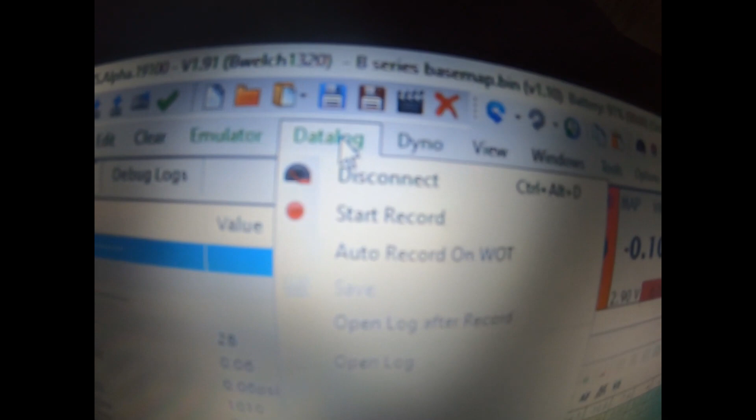So when I get my stuff set up, especially for the data logger, it's actually recording right now. Still kind of learning the software, but as you can see, that's pretty much my first try getting the emulator and the data logger working. First try. On BM Tune, it took me at least like 10 times. I had to switch back from Crome, and it just kept on having issues. So that's a big thing right there, which makes me really happy with the software, is everything got hooked up the way it should. First try, I had no issues whatsoever.

So big points for HTS, and I'm looking forward to using this tuning software a lot more. Definitely a lot better than Crome. The H22 we got coming over is just factory bone stock, so it should go pretty quick, shouldn't have any issues. Hope you guys enjoy this little street tune we're gonna do.

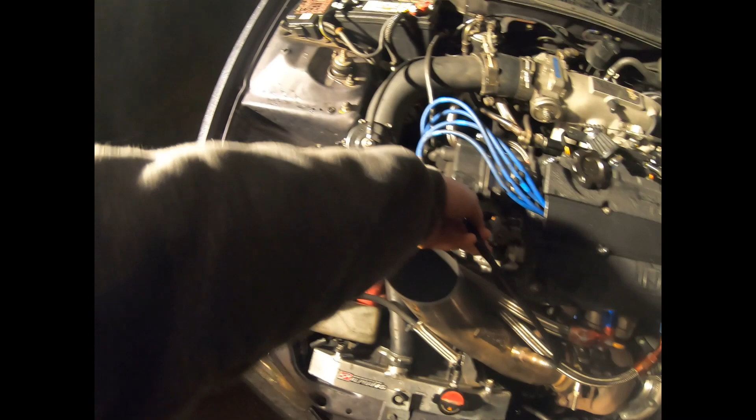Alright, gotta get the wideband pulled off the streetcar. Pretty simple with the up pipe, just goes right through there and out. And I got it set up pretty fancy. All I gotta do is unplug my cigarette lighter, and that is how I got my wideband wired in. Just in this little cigarette lighter, connect my power and ground, and it works just perfect for easy, quick disconnect wideband. It's been working good for me so far, and really simple. Instead of having to disconnect your chassis ground and disconnect it from the fuse box or however you got your power hooked up, that little cigarette lighter trick I like a lot.

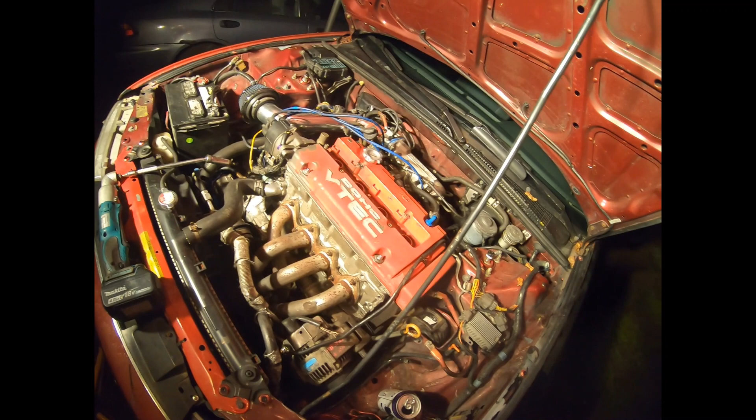We got the car here, H22A. We're getting the wideband hooked up right now. Pulling out the spark plugs, see what the previous tune was like. These spark plugs are showing signs of spark knock. So the base map that it was on was actually hurting the motor.

We got a fresh set of plugs that we're gonna throw in after we get fuel all dialed in and get ignition at maximum brake torque on the low cam. Then we're gonna throw in our new plugs and start doing pulls. But this is what the old spark plugs look like. I don't know how well the GoPro is gonna pick it up, might take a minute to focus. Anyway, plugs don't look good.

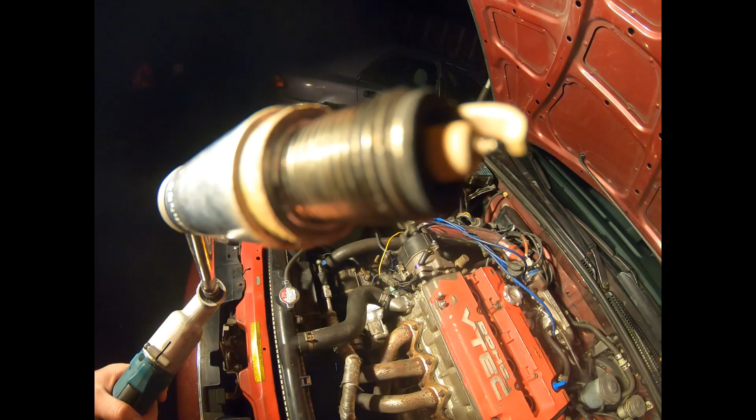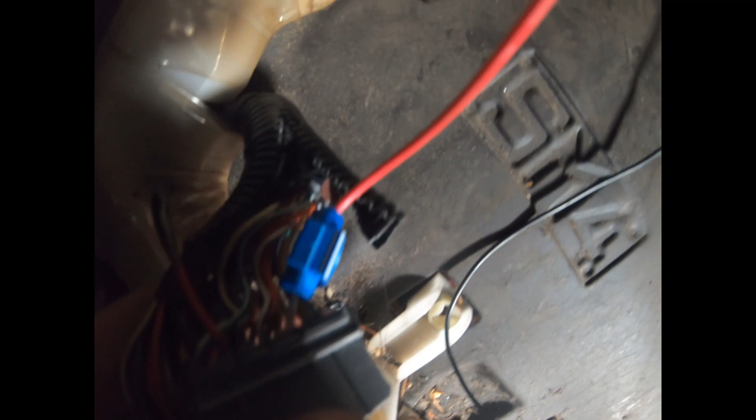We got a new set of BKR7Es that we're gonna throw in. Got the wideband all hooked up, we're just gonna go out through the hood for now. And then we got our wideband tapped into D14. Just using one of these simple blue quick splices, see if I can get some good light. I use these all the time, they work pretty good for me, never had any issues. That splices into the D14, then got that going to my white wire. My wideband goes into the cigarette lighter, and now we have wideband.

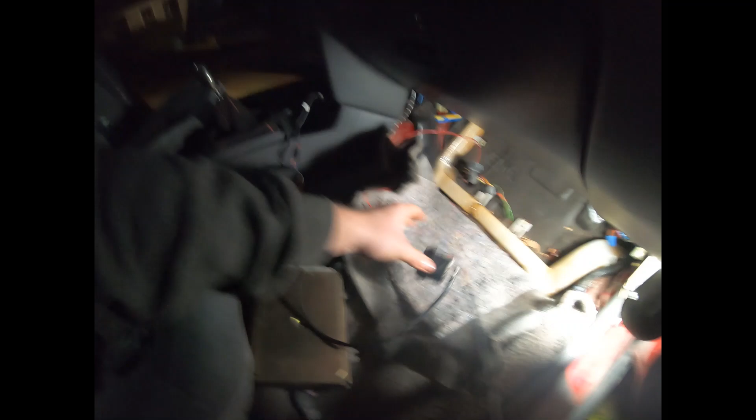Now I just gotta get my ECU plugged in and get the tune loaded and try and get the car to fire. Okay, we're ready to get the tune uploaded. Gotta connect the emulator. Bam, first try. Data log, connect, everything popped up, first try. Connected, perfect. Gotta upload the tune.

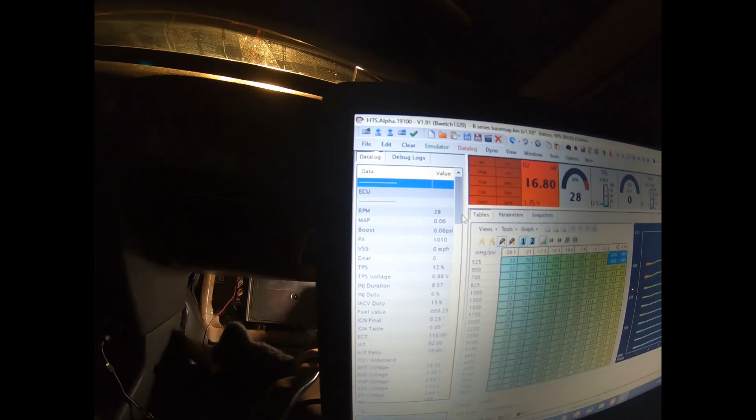Looks like we're going here. Real-time update is selected.

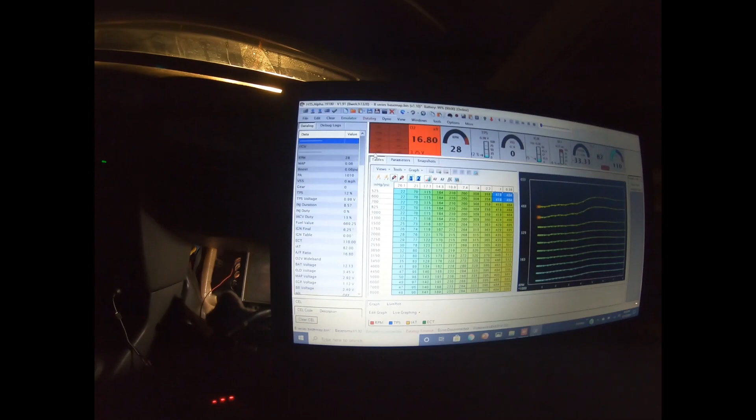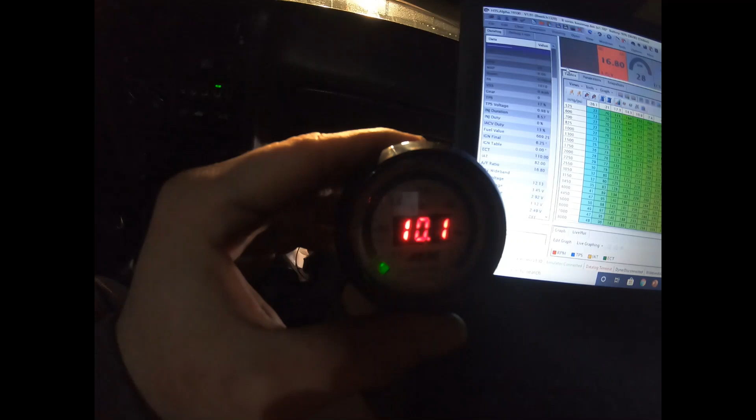Alright, start the car. It's never started that fast even. Wideband's warming up, so far it's saying it's dumb rich. Give it about 30 seconds or so. Check engine light is on.

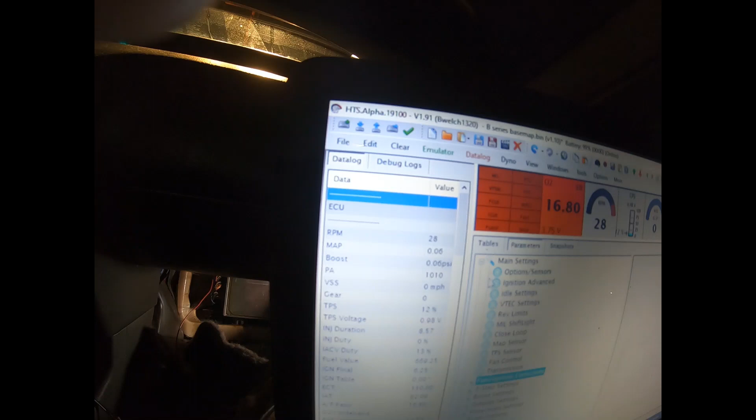Go through my parameters, see if I can find anything while the check engine light is on. Okay, I'm just gonna run through my parameters real quick, I'm gonna trim out some fuel. Oh, it's already starting to trim out by itself. Then I'm gonna run through the sensors, trim out a little bit of fuel, and then I'll get back to you guys.

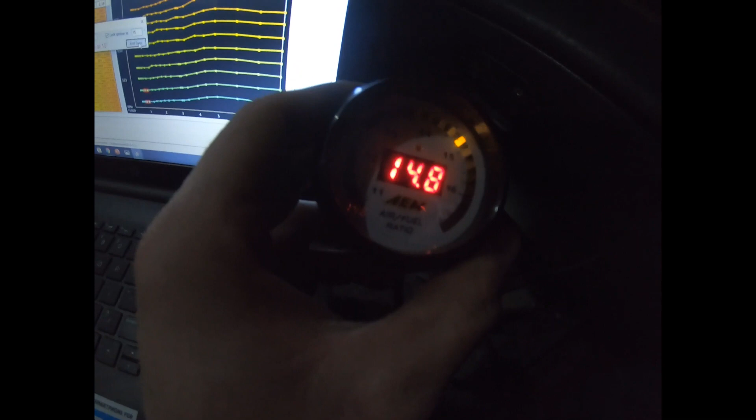Okay, we got everything sorted out. Got timing synced — well, not synced, we got it locked, so we're ready to sync it. Air fuels are good. We had to try a couple different ROMs to get the software to work, but we got it working now, and we're getting ready to shoot timing and go out and do some street tuning.

Okay, got timing set, 15 degrees. Can lock this in now. Man, mint. Okay, we're getting the car out on the streets now.

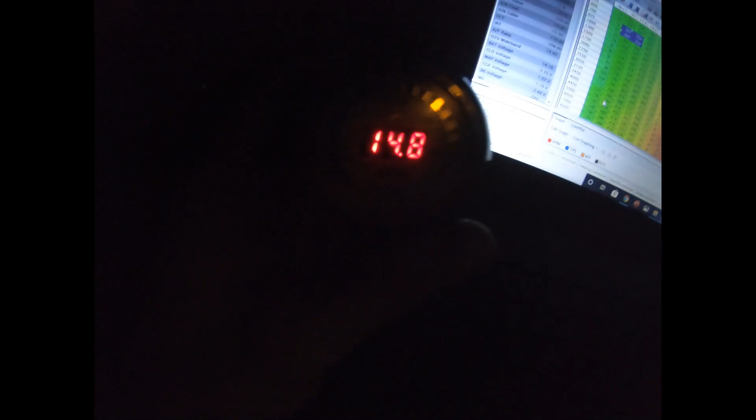Just doing our part throttle. Okay, we just got our Lambda overlay set up. We're gonna build our table, and then we're gonna make our adjustments. Right now, car is really rich, starts leaning out a little bit. It's 2,500, keep holding it. Okay, go up to 3,500.

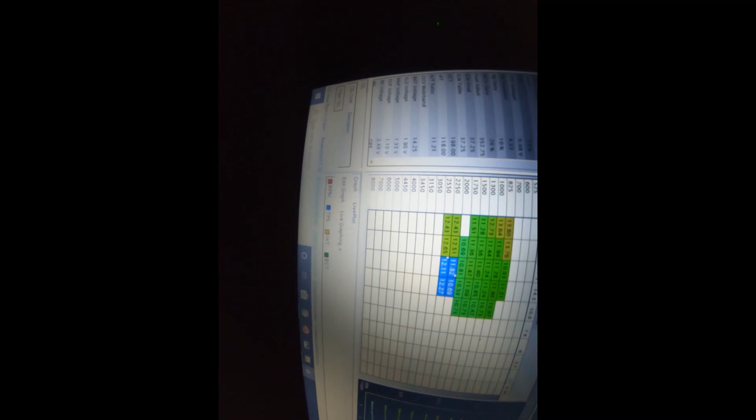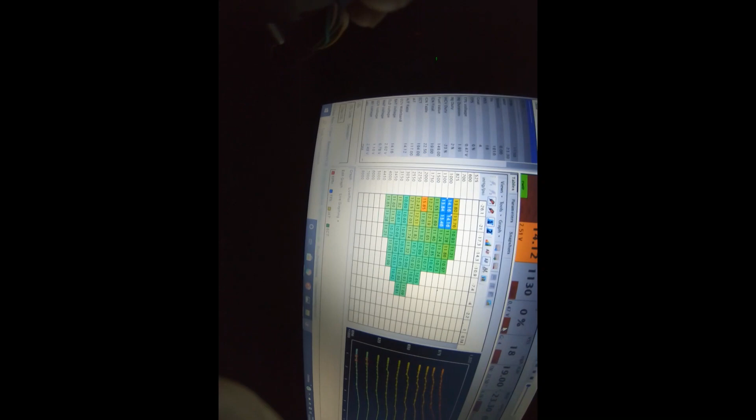In that area, we're gonna pull out fuel, make our adjustments, smooth everything out, make it mint. Just got a bunch more fuel pulled out. Now we're about to go make our second drive.

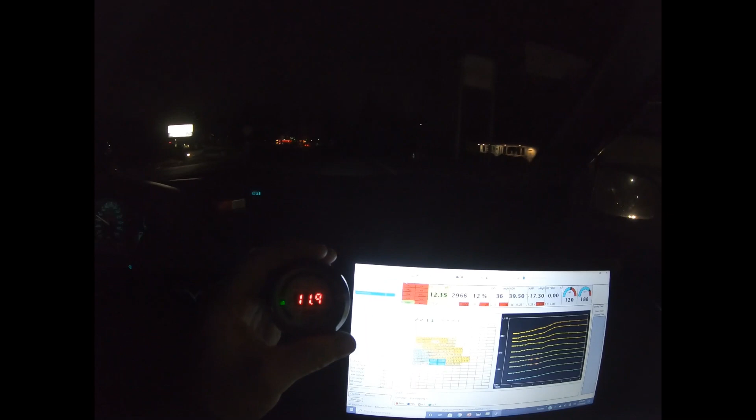Still rich, so we'll pull out some more fuel. We'll just drive around town now and I'll make some minor adjustments. We'll keep on going up to about 4,000 RPMs real slow so we can get accurate data points, and I'll keep making adjustments, and after fuel's all dialed in, we'll get into some wide open throttle pulls.

So far the software is working pretty good.

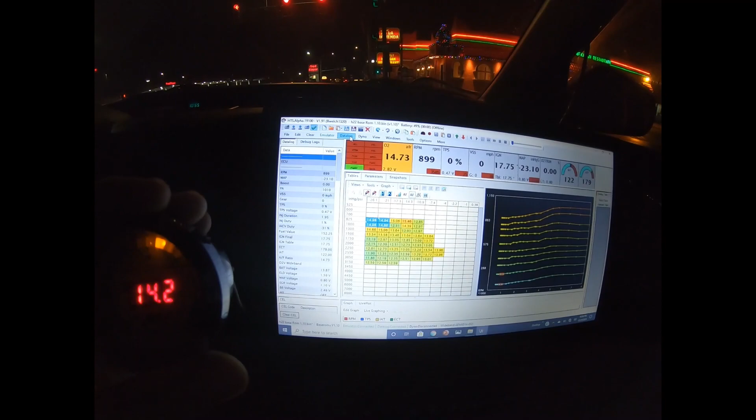Did I not just record all of that? God, that was good too. Damn, dude.

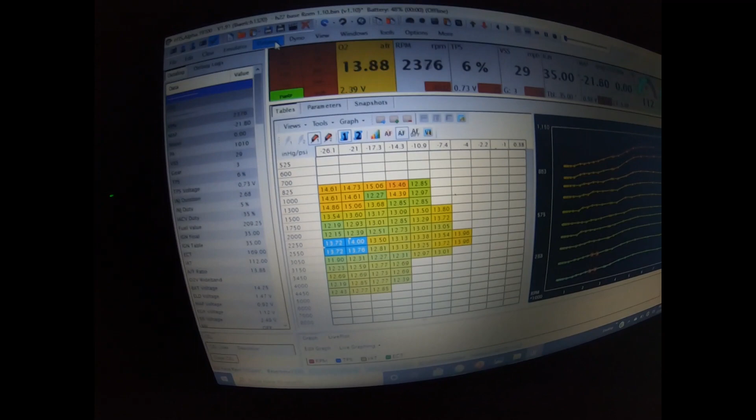Okay, we're driving around on the street now. We made some fuel adjustments, pulled out a bunch of fuel, and now we're populating the chart some more. We're gonna make some more fuel adjustments, just taking the car up to about 4,000 RPMs really slowly to get accurate data points, and then make our adjustments.

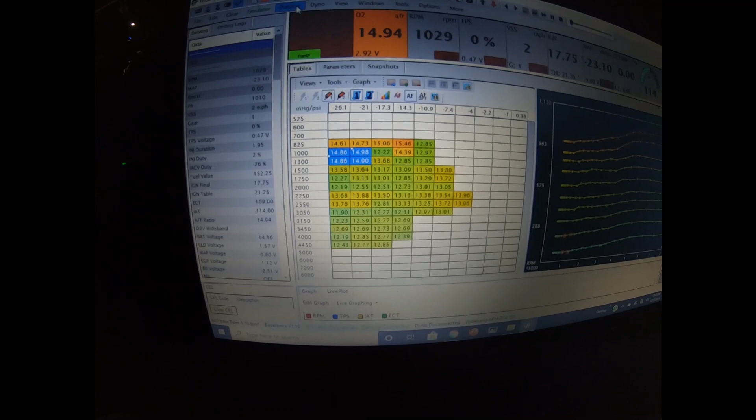Software is working pretty good. I had to mess with it for about an hour and a half with the ROM, but after I got that all figured out, it's working good now. One thing that works good with this is the real-time update, and that did not work on BM Tune, so that's something I'm really pleased with this software, and I'm excited to see where else the tune goes.

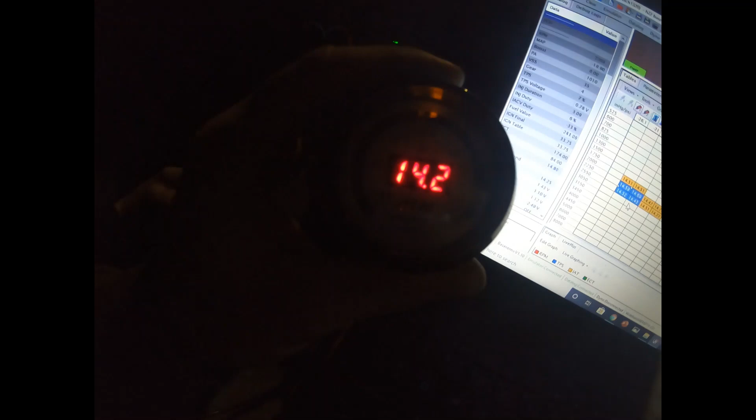Low cam feels, tune pretty decent. You could probably floor it in third up to 5,000.

Doing some wide open throttle pulls. We're rich, so we're gonna pull out some fuel, and then we're gonna do some more wide open throttle pulls until our air fuel gets to our desired goal, which is 12.5.

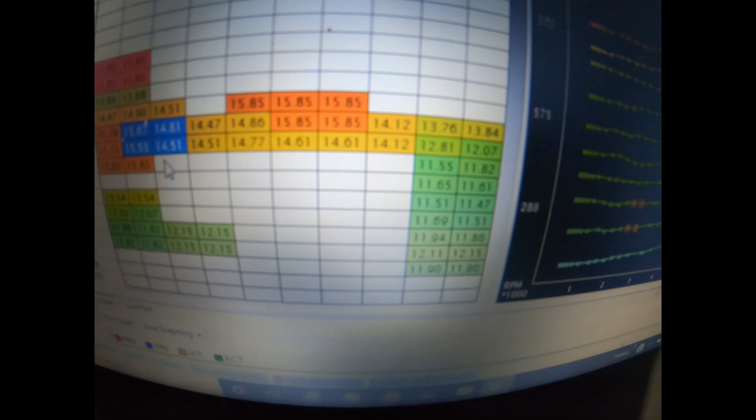Tuning in open loop. Feels pretty decent. You can still pull out a little more during idle.

We're good to do another third gear pull when you are. 2,000 up to 3,000, or up to 5,000.

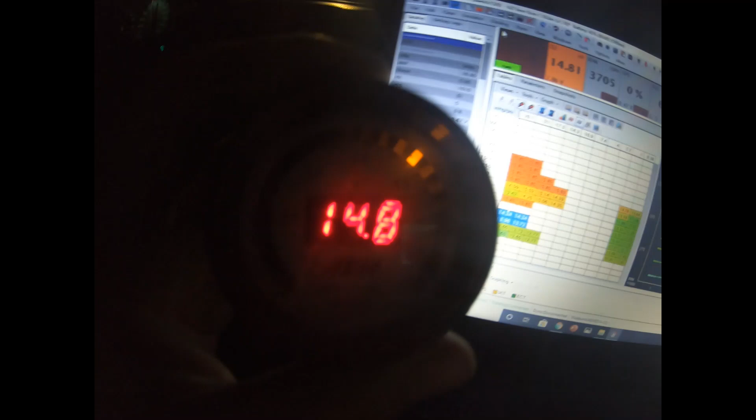Okay, so it's definitely still rich. It was in the 11s, so I'm gonna pull out more fuel and adjust.

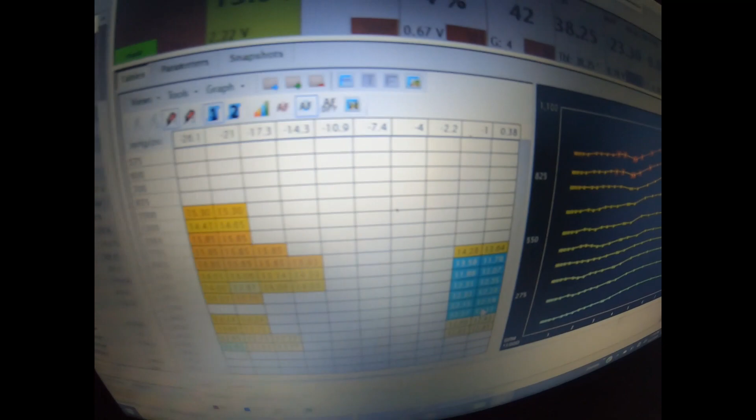Gotta turn off the data logging to make my adjustments. Pull out another 4%. Then just kind of smooth it in. Blend in all my changes.

Okay, you're good to do another 2,000 to 5,000 pull. Third gear. Rich.

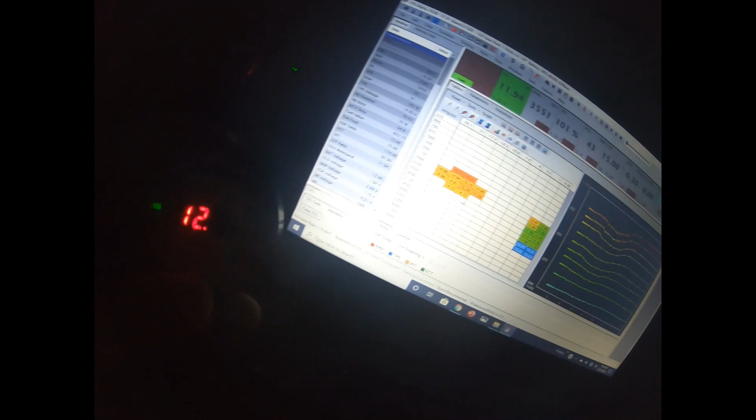Okay, it's getting closer. Still got to pull out a little bit more fuel.

Huh, he definitely heard us. He started flashing his flashlight.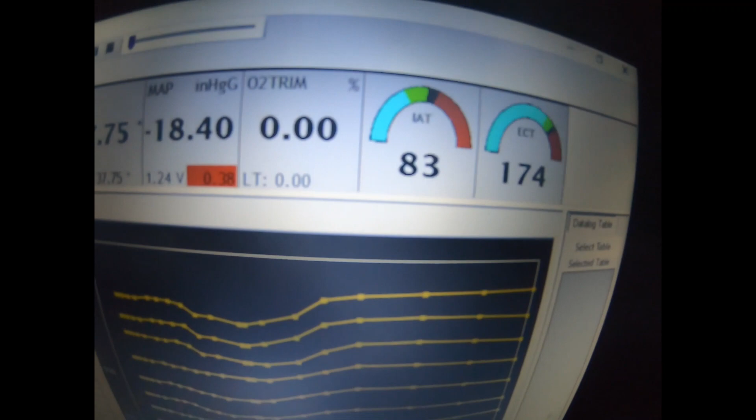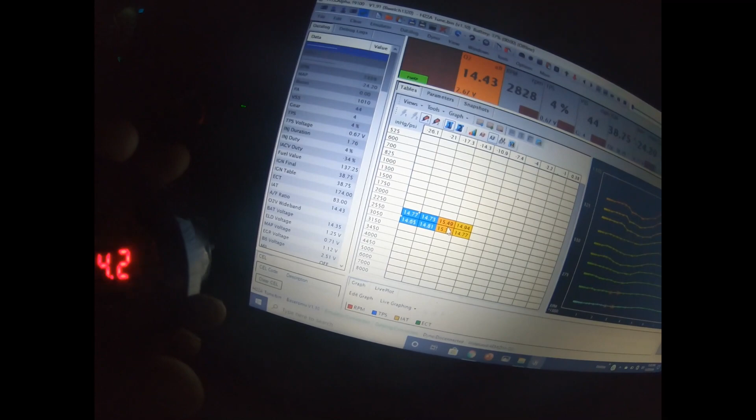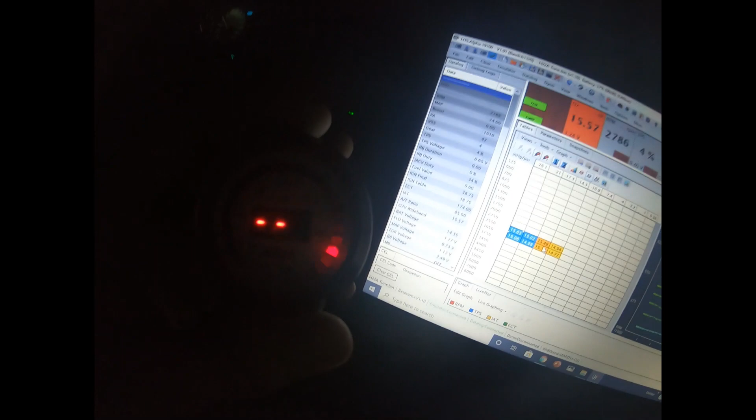Okay, car's got good throttle response. Fuel is pretty close. This car is going to be tuned on open loop, so our air intake temps are pretty cold, so we just have to make sure that we keep our air fuels a little more on the rich side, because when it gets more hot out, the car is going to want to run more lean. We have to keep that in mind. Right now it's around 14.8, 14.7-ish, so we probably have to add just a little bit more fuel into that to compensate for when the car sits for a bit, like at a stoplight or in a drive-through, and air intake temps get more warm. If we throw in an extra about 5% fuel, maybe even like 3%, it'll help compensate with all that.

So we're ready for another pull. Third gear. We can even try 3,000 to 6,000 now.

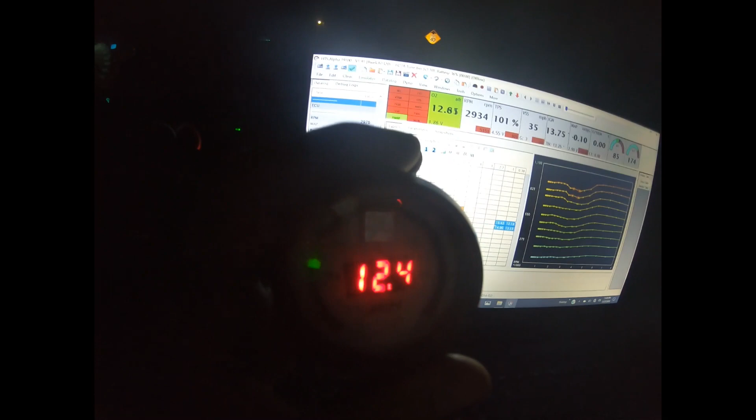On the top end, gotta pull out a little bit more fuel. Other than that, it looks pretty close, pretty spot on if we're gonna compensate for the air intake temps too, since those are so low.

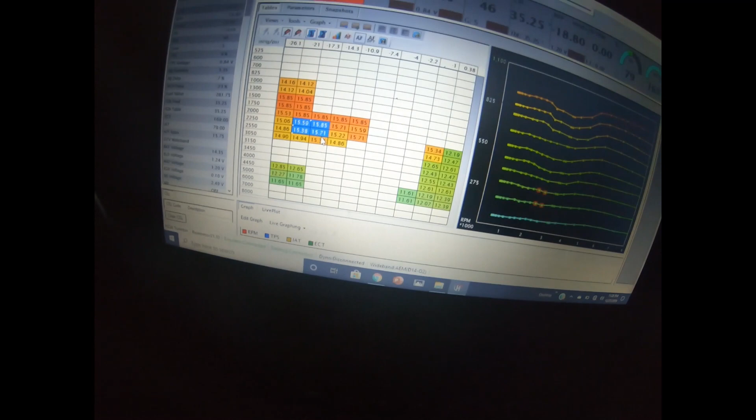So yeah, pull out fuel. Gotta turn off data log, go down here. Pull out another 4%. Smooth that in. Mint.

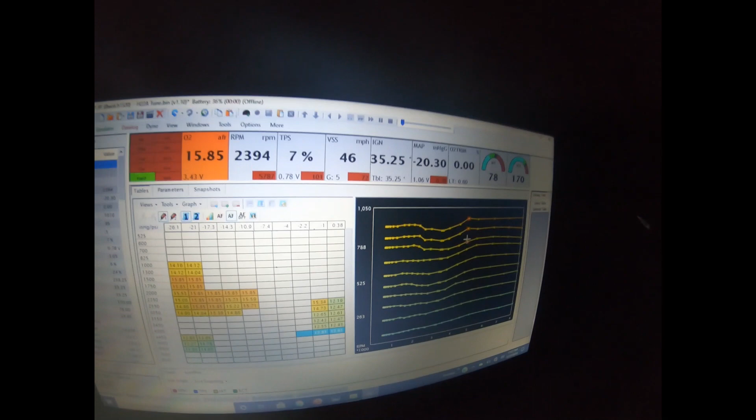It's getting a little close. Smooth that in just a wee bit.

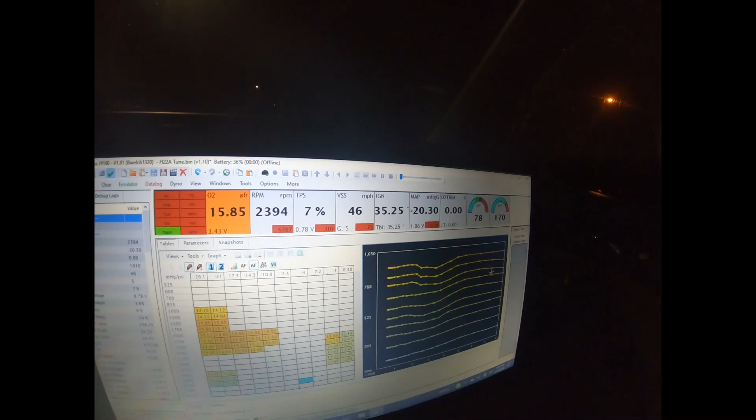Picking the tune a little bit, making it how I want it to look.

And we're probably good to do another pull at the stop sign if you actually want to do like a 1, 2, 3. Yeah, we can get through this way. We'll take the other route. Oops, let me clear the graph.

Since our air fuel is pretty close right now, we can see what the 1, 2, 3 does. Make sure all our air fuel is pretty decent. Wide bands right here. Ready? Yep.

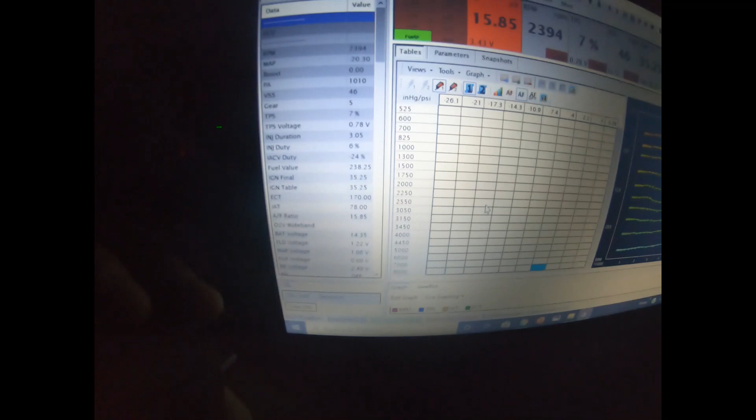Air fuel is pretty good. I did not press record, so I didn't get none of that. But from what I seen, there was just one little tiny lean spot that I gotta clear up. But yeah, that looked good, man.

Oh yeah, it logs up here. So yeah, if you want to do that again, yeah.

Straight tuning, straight hooning. Fuck yeah. I did the stop sign, so.

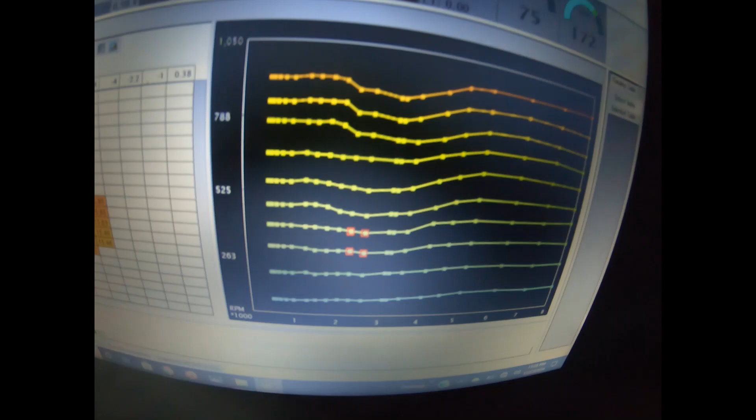Graph's starting to get pretty good. We got a weird slope going on up here. Usually that's an indication of bad injector dead times. These are stock prelude injectors, so I don't know what that's about. Got a weird dip right there. Oh well, stock injector thing.

Hold on, before you do it, I gotta clear the table. Okay, table is cleared. This is the low cam, no VTEC.

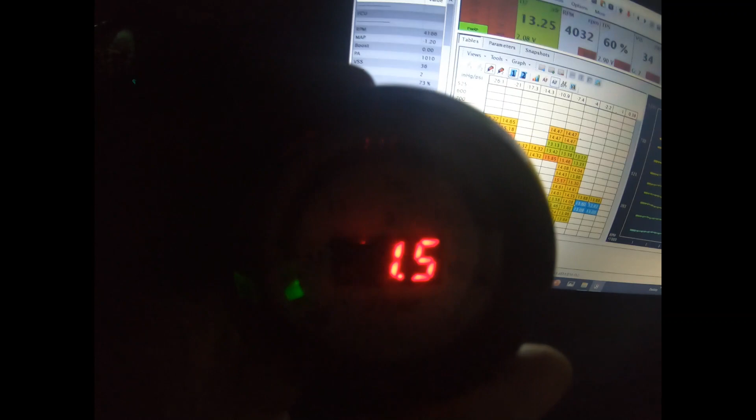Not too bad, not too bad. Burning evenly. Pulling over to swap plugs real quick.

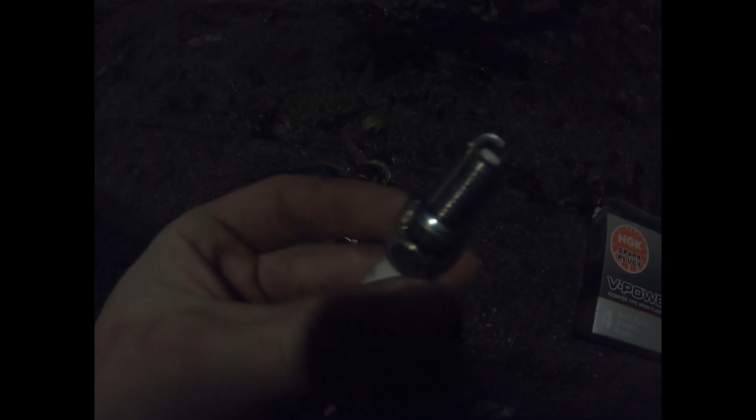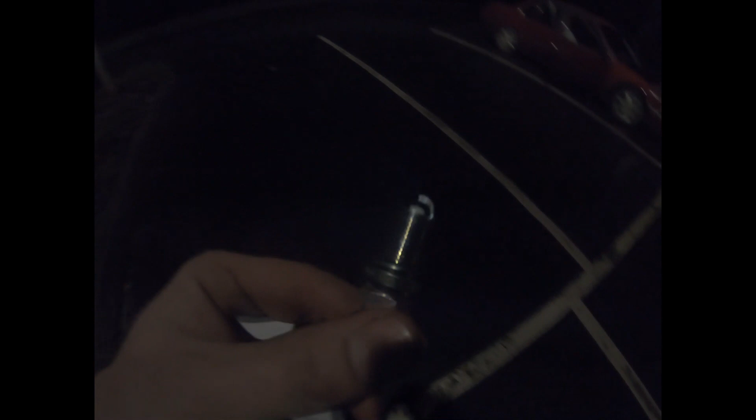Gapping them right now at the BKR7s. Got my little light right here, got my little gapper. Gapping them to 44 thousandths should be fine—stock injector, stock car, stock gap will work just fine. Actually, changed my mind, went to 40 thousandths.

There you go. Where's my flashlight? Make sure we hand tighten them in so there's no cross threading. I just use my impact—dun, dun, dun, dun, dun. Yeah, I'm weird like that. I've had bad luck with that kind of stuff, so I hand tighten it, get it all the way down there.

This way we're gonna have to pull these plugs after every pull now, so I've gotten fairly good at it. Do a pull, kill the car, pull plugs, check ignition, do it again.

Cool, new plugs are in and we're ready to do a full throttle pull on the low cam. Kill the car at the top of the pull, and then we'll see where ignition's at. If we can increase it, we will. If not, we'll just switch over to VTEC. Fun stuff.

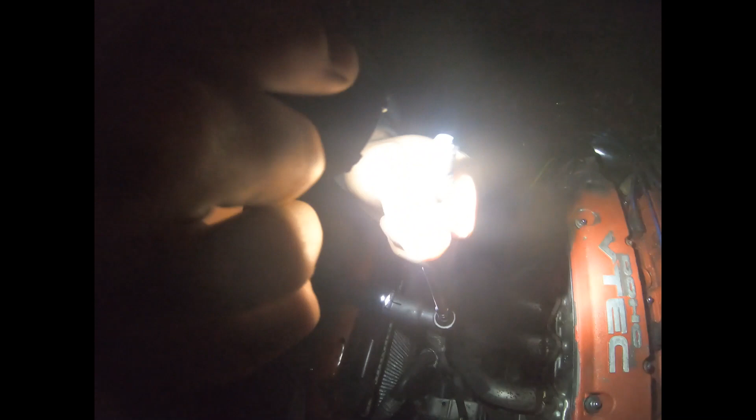Oh, I'll be goddamn, we just did our first pull. Spark plugs are looking really good. See a little bit of a cloud, so that means they're not getting a proper combustion, so I can turn it up just a little bit. But just on the low cam, it's probably fine.

It felt pretty good, right? We'll probably just switch over to VTEC. Yeah, feels good. Okay, so we'll probably switch over to VTEC, do some more pulls.

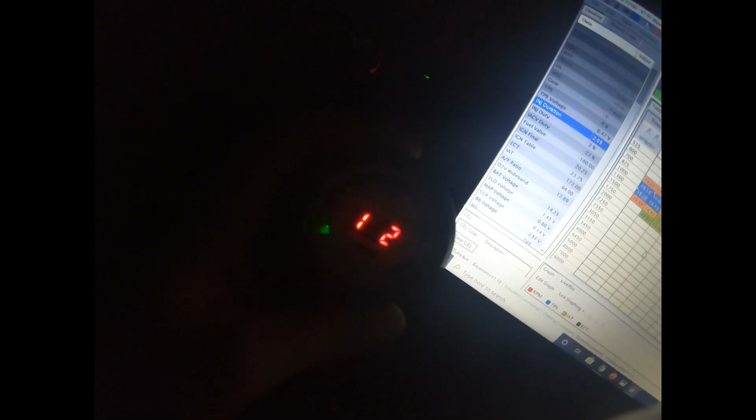Okay, so we got the low cam pretty much fully tuned. Ignition's in a good spot, fuel's all in a good spot. So we're gonna do another 1, 2, 3 pull to make sure all the fuel's looking legit, and then we'll switch over to VTEC.

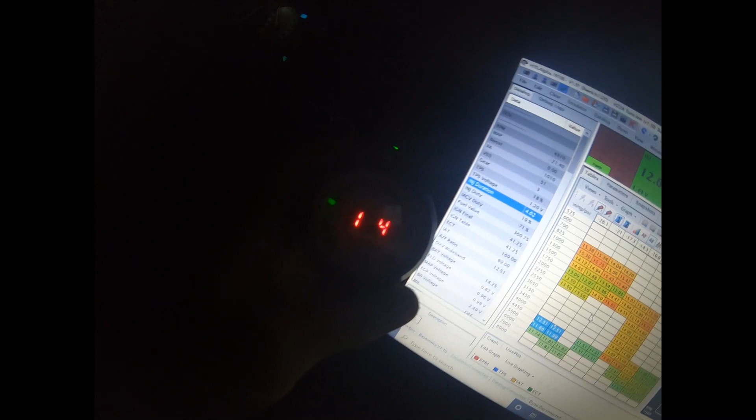One little rich spot we need to clear up, and she's good. Straight tuning for the win. Well, yeah, just gotta know your roads.

Third gear pull, still on the low cam.

Car's mint, time to switch over to VTEC. That was a skater. Was it? Yep, that was already on the brakes before we crested the hill, so.

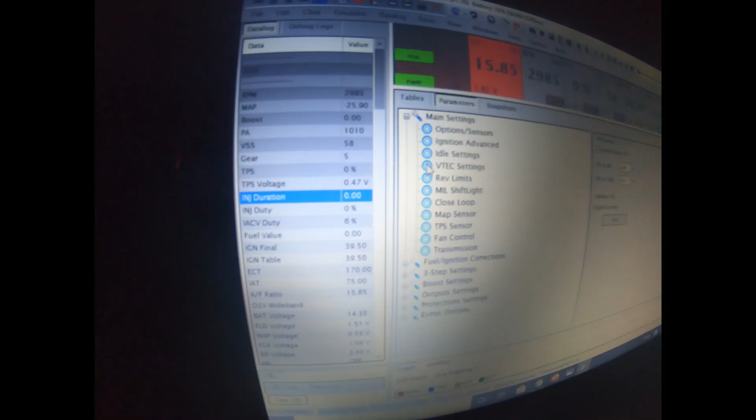Enable VTEC. Pull off some—no, it's fine. Oh actually, yeah, I gotta do a little bit of stuff over on the high cam to get it all set up. You want something to drink? I'll buy you some. Yeah.

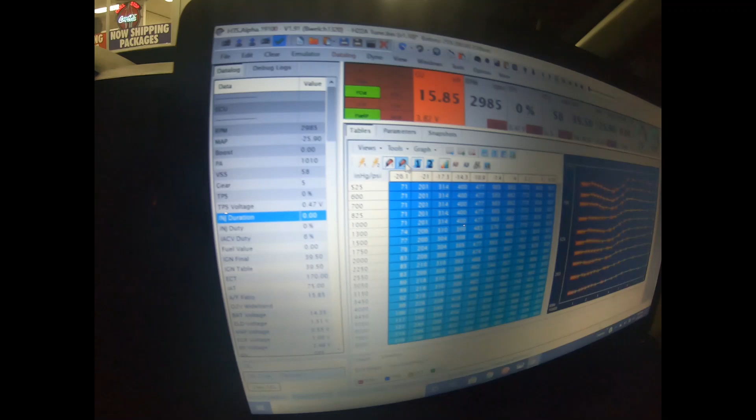Got VTEC all set up. I set it at 4,500 for now, just to get fuel all tuned in, and then we'll select our VTEC point, probably around 5,000, 5,200 or something. We're not going to be using the virtual dyno on this, so we'll just kind of fill in and see what feels best. Right now I'm kind of cheating—I'm just going to copy my low cam, paste it over to my high cam, then add in another 20%.

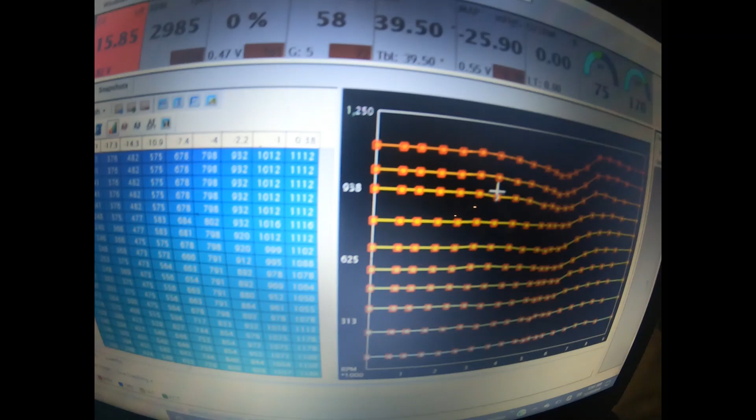Where is it? Control J. 20% should get us close to where it needs to be at. I'm guessing all this weird dip is going to go away—it's going to be more linear and straight. So we'll see, we'll take a data log, play it back, see what's all going on.

Something I'm really happy about is the data logging graph they got going on here. I still need to set up my settings and everything, but this is exactly how Hondata is, and I'm really happy with this right now. I couldn't do this on BM Tune, so really stoked about this software.

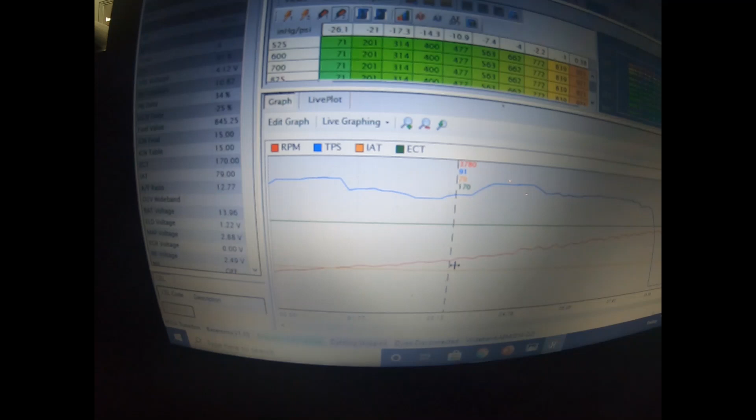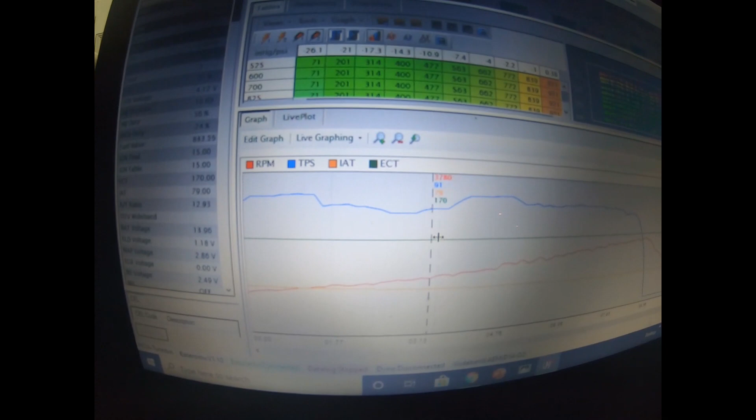So far so good. The only issues we had was earlier when we had to switch around on the things, and that only took like an hour and a half, which is still kind of a big deal. But so far I like the software a lot—definitely way better than Crome, better than BM Tune by far, and it can pretty much do everything that a Hondata can do with a couple extra features too. Really liking the software so far.

Making sure VTEC works. Oh yeah. Perfect.

We're gonna pull out a bunch of fuel, get fuel all dialed in, and then we'll up ignition, because we can definitely tell the car's got no ignition on it on the high cam, because it's slow. So we know that we can definitely turn the car up more. Get it dialed in on the high cam, she'll be mint.

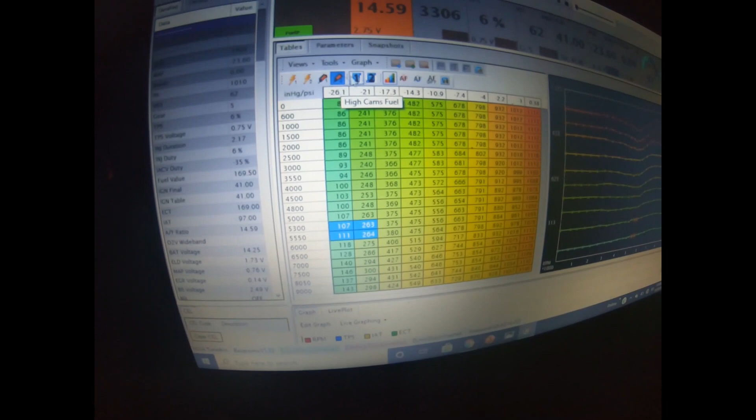So let's disconnect the data log, check the high cam. I'll just grab the whole map.

I seen it was in the 10s, so all those aren't right. Since it was in the 10s, pull out 10% of the whole map, kind of see where it goes from there.

Connect the data logger. Alright, dropping in third gear. For the recordings, if you can, go from like 2,000 or right below VTEC—so it's at 40—do like a 4,000 pull up to 7,000.

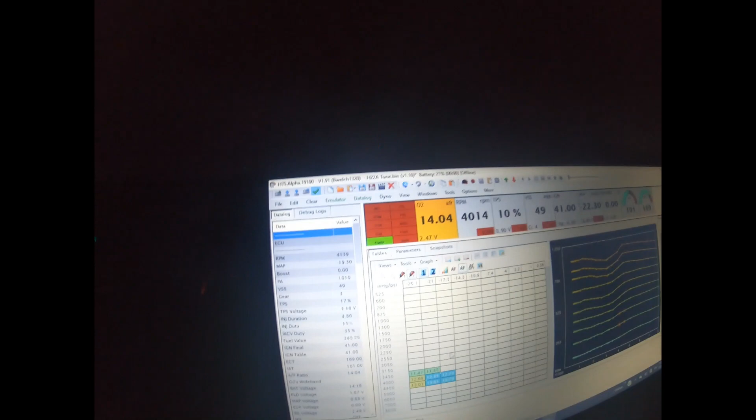Took out just a hair too much fuel, throw it back in, and it's already almost all the way tuned.

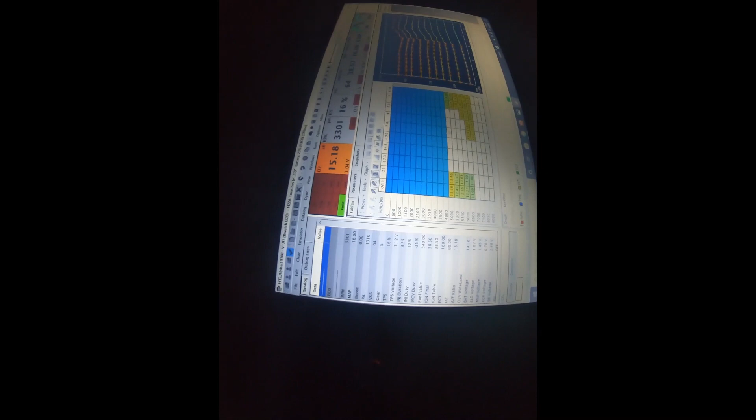Okay, pulling out 6% up top, smooth it in a little bit. Add in a little more.

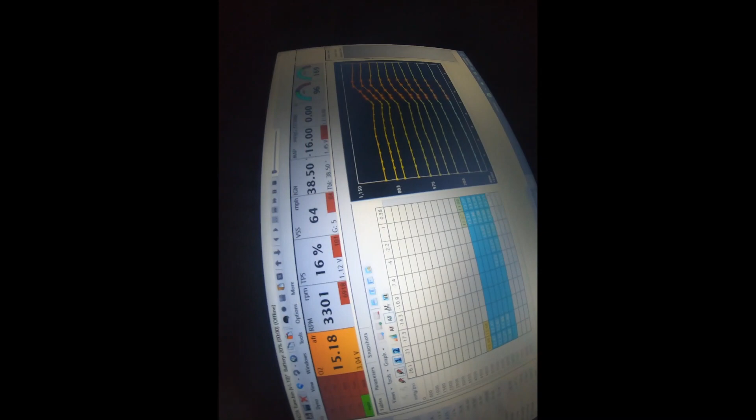Laptop is getting pretty low, so we're gonna have to cut the tune kind of short. Car is almost fully tuned—it's at least really close.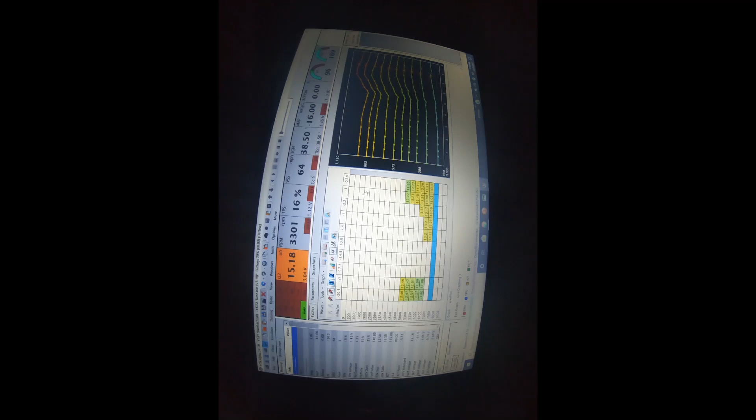Okay, we'll see where all of that landed us. Clear my recordings. Alright, let's do another third gear.

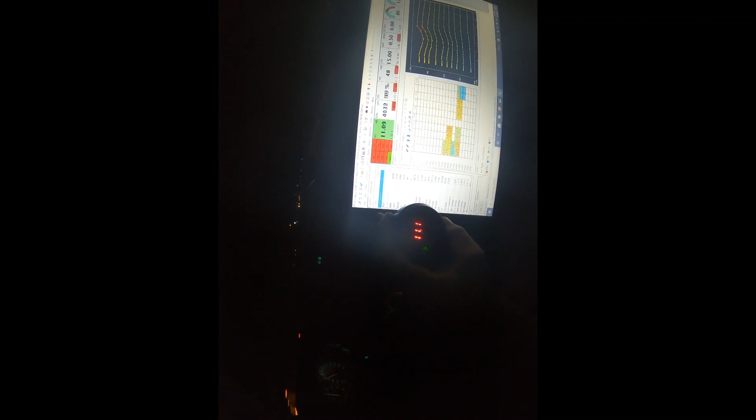Heard VTEC cross that time. Okay, just gotta clear up a lean spot and take out a little bit more fuel when we first cross over. And then our fuel was pretty much dialed in. Just like that. Wham bam, thank you ma'am.

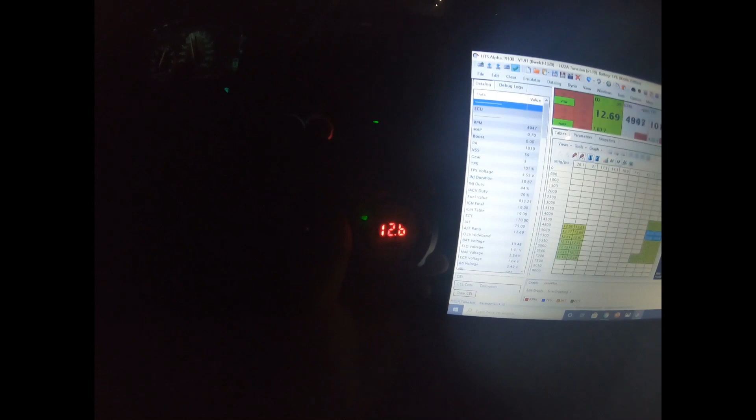HTS tune. One second. Okay, go. Getting ready to check plugs. Check the spark plugs, and then if we can, we will up ignition.

Side of the freeway, baby, street tuning. I just had like a spark knock, had to check my spark plug. Everything's good now. Car's good to go. Yep, we are good. Car is good to go. Perfect. All right, officer, you have a good night.

Well, checked the spark plugs, and with the ignition that I had in the tune, it's right where it needs to be, and you probably can't see nothing because it's all dark, but yeah, so we're pretty much gonna call the tune good, fuel is good, ignition's good. That's about where this car is gonna end. Probably a ported intake manifold, maybe a little bit better flowing exhaust, and might be able to make it a little bit faster, but for now I think that's where the tune's gonna end.

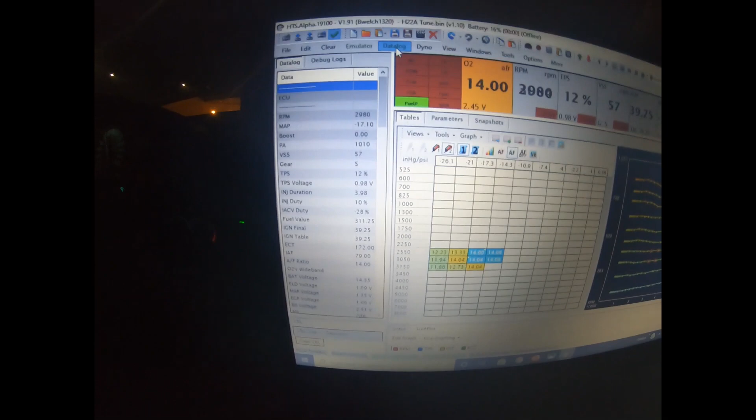Make sure I'm saving this, laptop's gonna die soon. Yeah, do a 4th gear pull. We're at 16% and the GoPro's at like 10%, so we're doing what we can. Yeah, I'm ready on my end. 4th gear, all 4th. 11s.

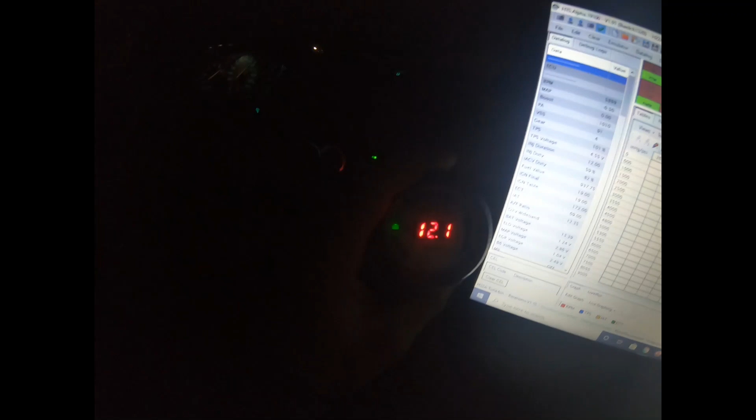Another car on the freeway tripped us out, messed up our pull. But anyway, I seen where it's in the 11s at. Yeah, we got it, 60, 300. Yeah, I feel it looked pretty good, so we are calling that tuned. HTS tuned, and we had a run in with the boys. Couldn't stop us though.

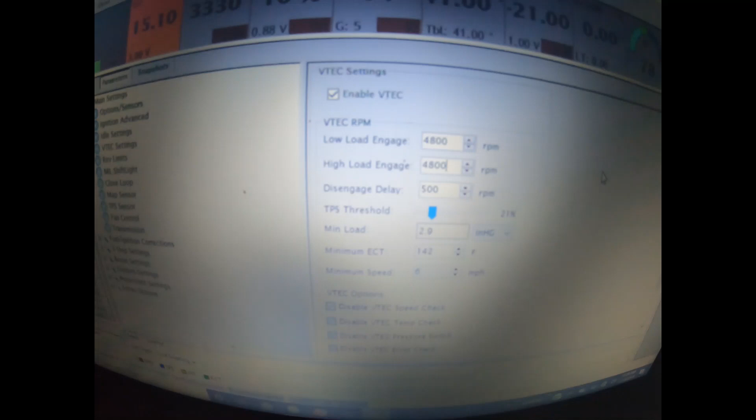Forgot I had a VTEC set low, so we're gonna turn it up to 48, see how it feels, and then we'll go up to 5,000, go all the way up to 5,500, see which one feels the best. That felt little.

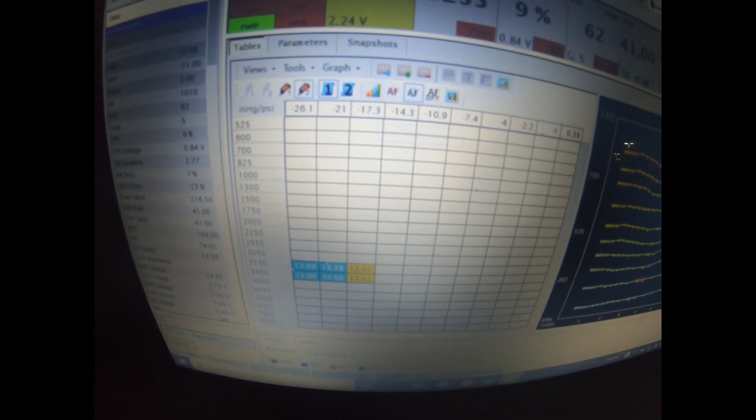Try it at 5,000, see if we can feel a difference. Get a little record, get a little data log in. Third and fourth.

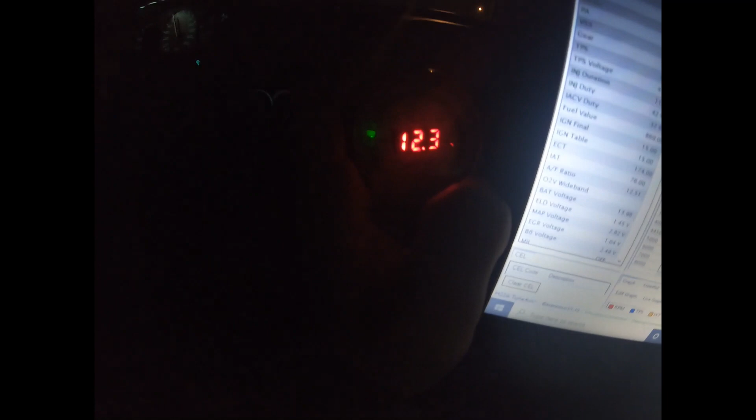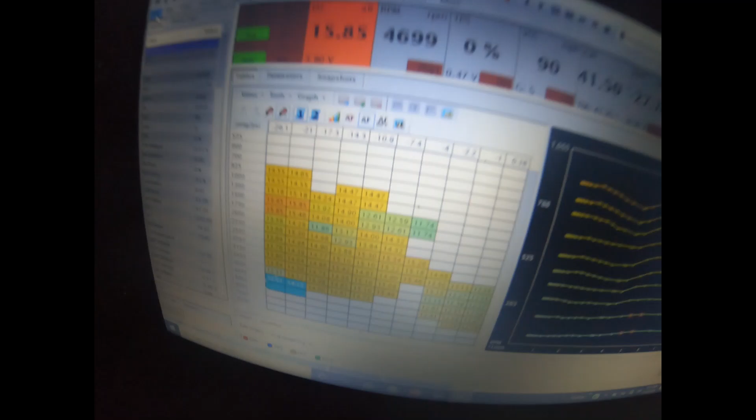There it is, there it is. Definitely pull out a little bit more fuel on the top end. But yeah, that VTEC crossover there was mint. That was titties, that was perfect.

Pull out a little bit more fuel, I'm just gonna kind of drag it down. Oh yeah, it smells right. Smooth it in. Alright, you want to try another 4th gear? 3rd to 4th?

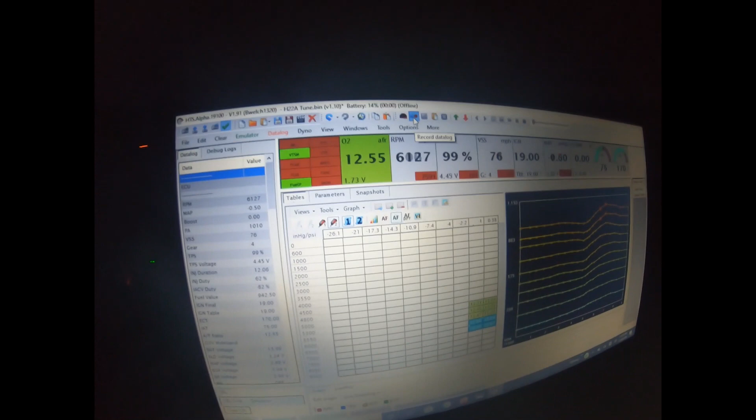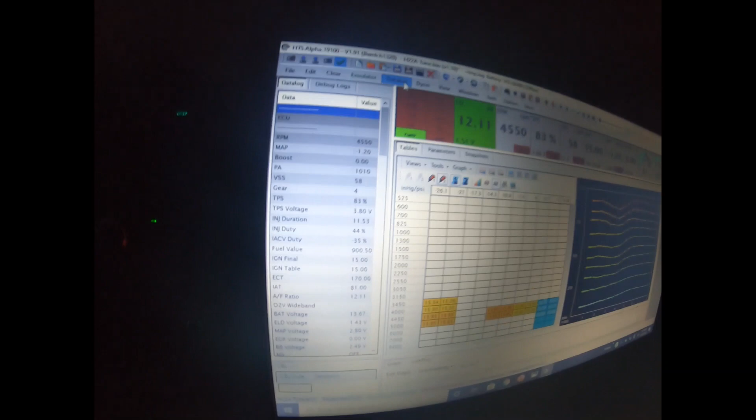Fuel I need to pull out on the top end, but it's safe, it's good, it's good to smash on. Yeah, it feels really good now. The transition is really fucking nice. All nice and smooth, she's mint.

Car's all tuned, we're calling it a night. Got the wideband all pulled off. Now we're just getting everything cleaned up and calling it a night.